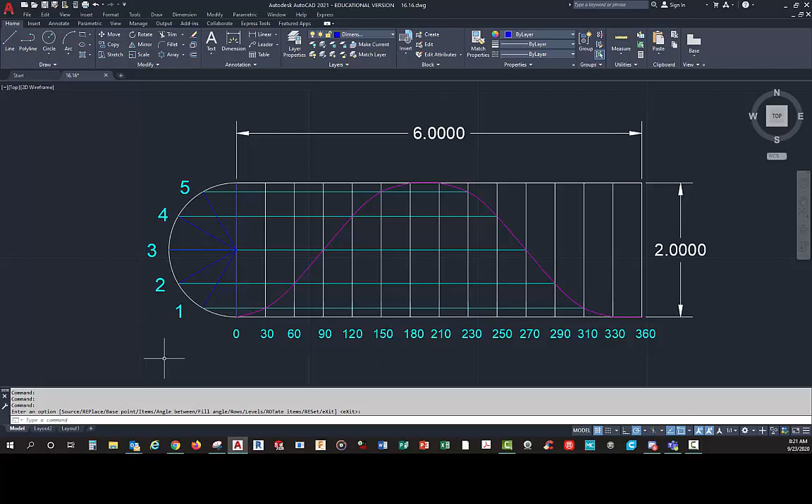Okay, that's good. For this example, it rises from 0 in simple harmonic motion 2 inches over 180 degrees, dwells for 30 degrees, and then comes back down in simple harmonic motion the same amount. This is a good example of how to do simple harmonic motion.

Alright, now let's take this guy here and copy him over. So now if you needed to do something more advanced, like uniform accelerated motion, you would need to get rid of this and this.

What you're supposed to do, what they show, is draw a line out here at some random angle, like so. And I don't think I lined it up. But anyway, it's early, so I guess I'm not feeling it this morning.

You never know when you might be actually watching this video. And there you go. Alright, so it doesn't matter.

I would actually probably just take this line here—and actually there's two lines, so that doesn't help me out. If I only had one line, that'd be good. Yeah, anyway.

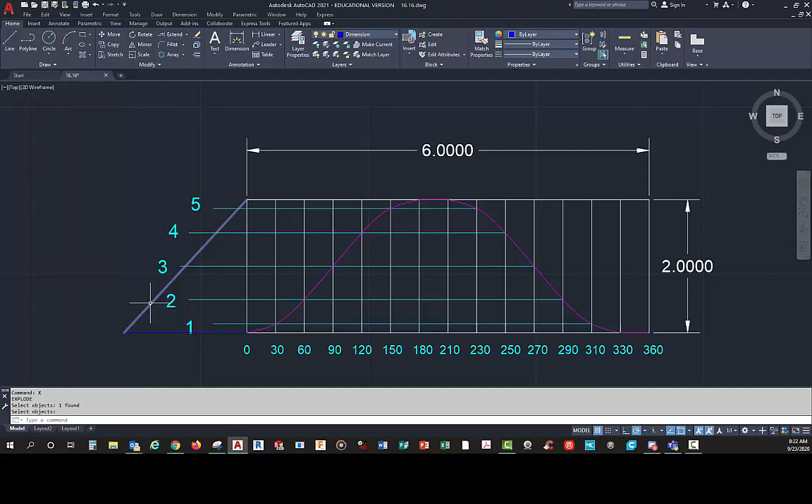Oh, it's a box, right here. I'm going to explode that so that I have separate lines. Hey, there we go. Okay, so what they show is taking this line here, and if you were using it manually, you would have an angled line.

Then you would take your ruler and line up your divisions, 0 on one end, lined up with this line up here. You'd line up with, in this case, 18 divisions, and then mark them all along your line, or mark them and extend them straight over to where they hit the line.

Well, in AutoCAD we don't need that—we have the divide command. You click on divide, click on your line, and it asks how many pieces you want. I need 18 individual pieces, so I'm going to do 18.

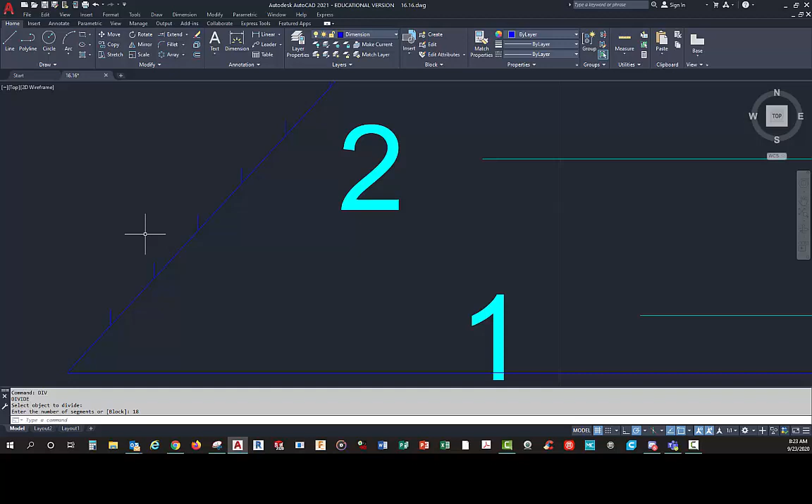You'll notice that whoever had this set up already has their point style set as lines or something. If you're not familiar with divide, what it does is create nodes, these little things right here. You have to come down and make sure this is turned on so it'll automatically snap to the node, so you don't have to keep typing node each time. That one's already turned on.

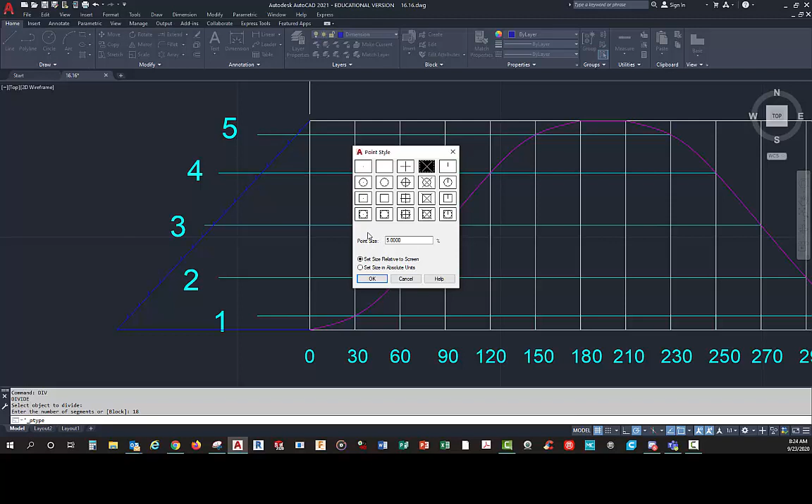The next thing I'd do is go up to Format. That's why you need to make sure this is turned on - mine says hide menu bar, if you don't have it on it'll say show menu bar. So I go to Format, then Point Style, and it pulls this up. This person's got it set at that. You might set it differently, I don't know, I always pick this for some reason. It doesn't matter. Then you hit OK.

Alright, so there are my points. The book says you need to do the first one, the fourth one, the ninth one, the 14th, and the 17th.

So if I scooch this guy over here, and then grab this guy - let's see, there's 2, 3, 4 - and escape. I'm going to make that a 4. This one's going to be a 9. The next one's going to be 14, add 1 in front of that, that'll work. And the last one needs to be a 17.

So we'll fix 17, click on here. Alright, 17 goes somewhere around here. 14. Alright, we've got 1, 2, 3, 4, right? 5, 6, 7, 8, 9 is in the middle, so we'll scoot that up a little bit. Now it's close. Then there's 10, 11, 12, 13, 14 is right here.

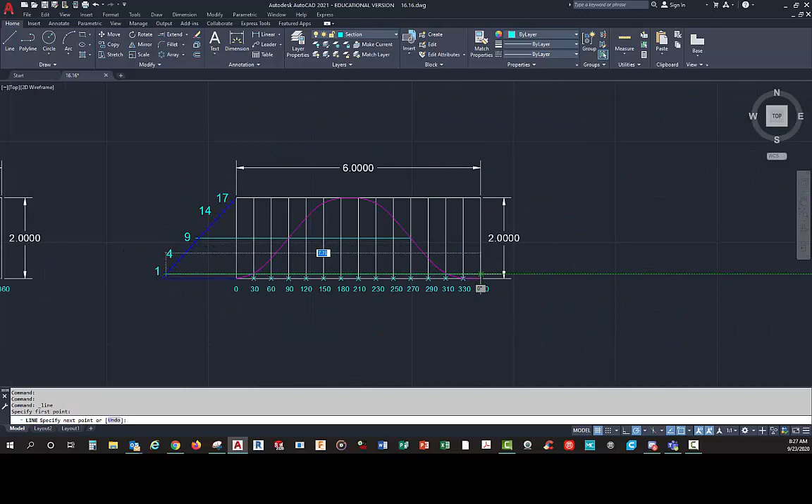I'll go back and we'll do this section line here. So I'm going to go line, and this is 1, right? So it goes over here. The next one is 4, so that's 1, 2, 3, 4, so I need to go line from there. Trying to get too fancy and help you out, but that didn't do me any good.

Now the thing is, if you look at it this way, we're in AutoCAD, so obviously you have 5 different settings, correct? So if that's the case, would you not have the same measurements possibly up at the top? Well, let's see - maybe you don't. Alright, so we've got 1, 2, 3, 4, 5, 6, 7, 8, 9. That one's good. 10, 11, 12, 13, 14 - aha, I miscounted, see, that's why you go back and check.

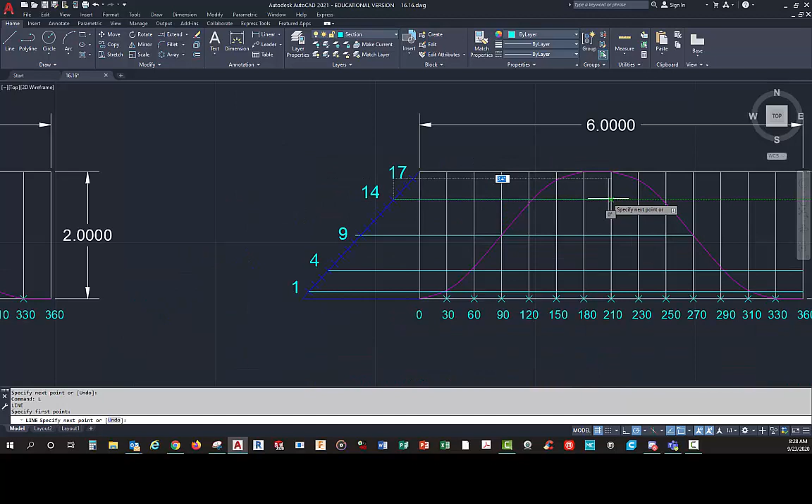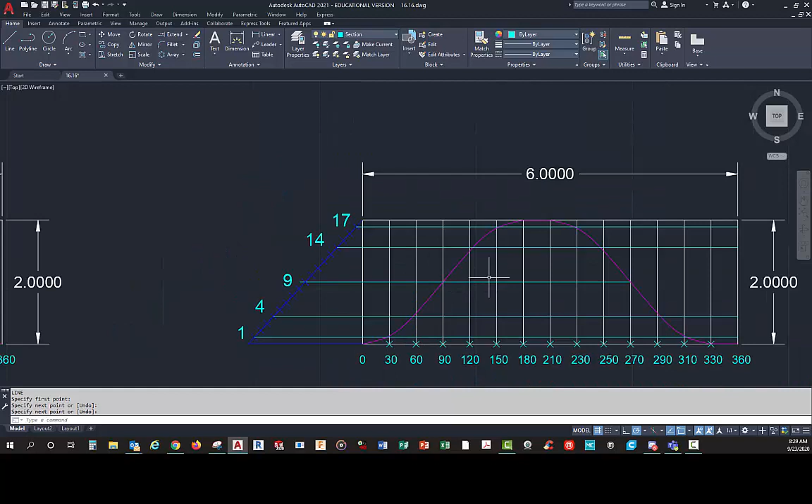Alright, it's not too early, I can actually draw - goofy. And then this one should be right here. Now I could probably measure the distance from here to here and it would probably tell me they're the same, but I don't know for sure. I'm not going to worry about it.

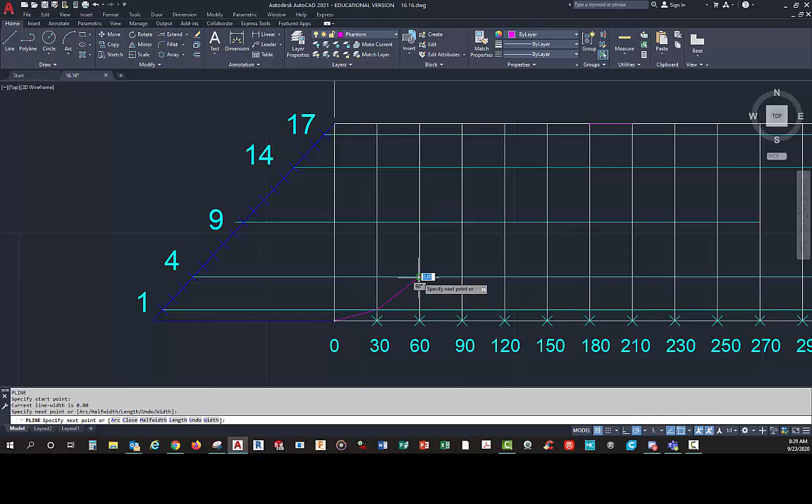Alright, so in this case, I'm going to go back and we'll go to the same one that they used, and we're going to do a polyline. You're saying, why are you doing a polyline? Well, I'll show you - if I do a polyline from there to there, from there to there, from there to there, keep on clicking, and boom. Okay.

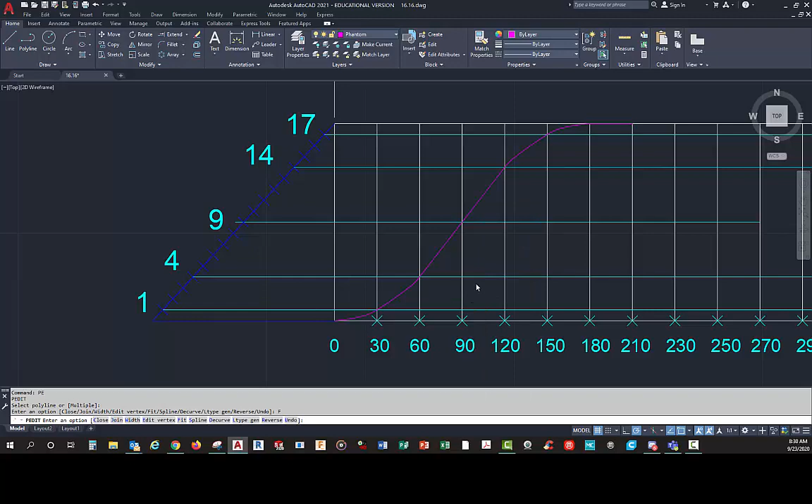So what I can do is type pedit, PE for pedit. I select the polyline and do a fit curve. Now that fits the curve to these points. If you do a spline, it goes outside of your boundaries, so don't use spline, use fit. Then enter to finish that.

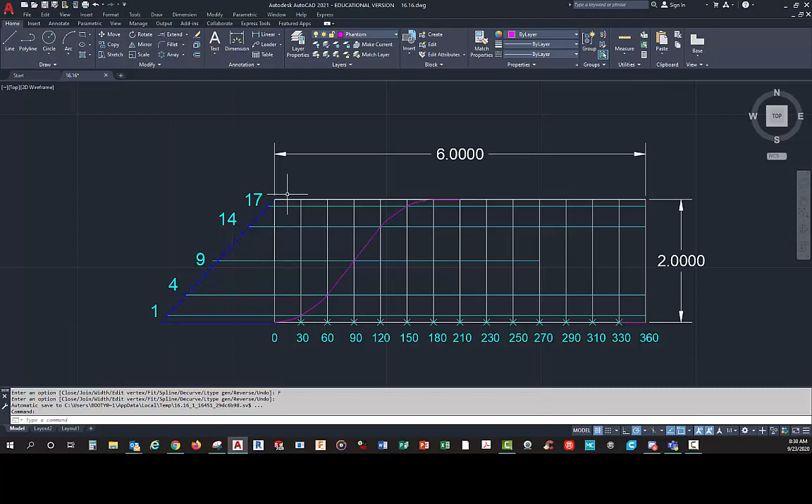Now on the other side, if it goes down the same, it finishes out the rest in uniform accelerated motion. So you have 1, 2, 3, 4, 5, 6. The main thing to remember is whatever it tells you it goes down in, you need to make sure that lines up with however many divisions you have, which here is 6. The other one with the half circle, simple harmonic, also has 6. So you have to keep that in mind and divide up your degrees to make sure it works. Sometimes you'll have something different than 30-degree increments.

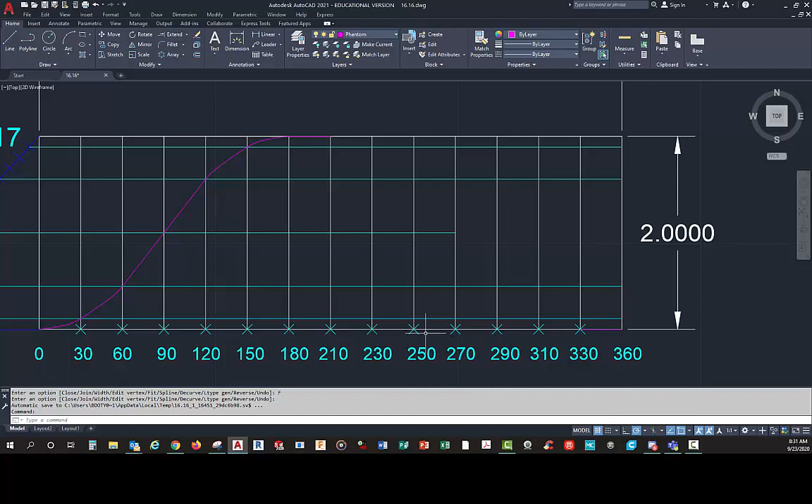That's why I've been sending back your work saying, hey, you need to fix this.

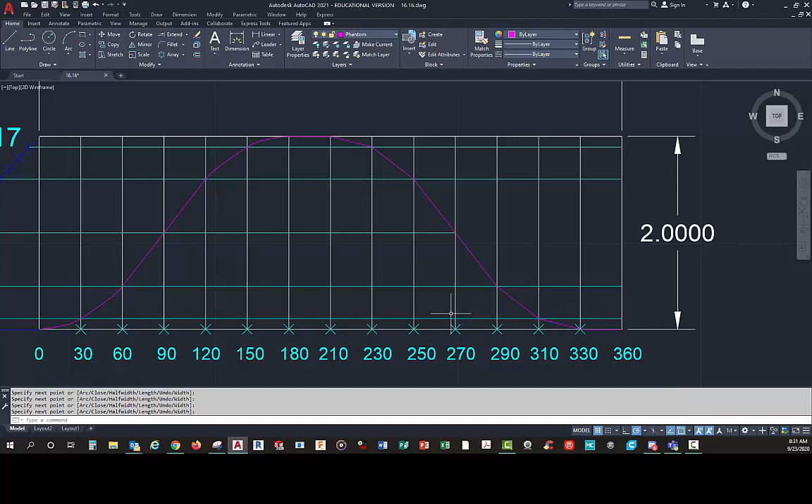Alright, so let's go back to polyline and go on back down the rabbit hole here. Bottom right there. I'm going to go to pedit, take the line, hit fit curve, and enter, and I'm happy with that.

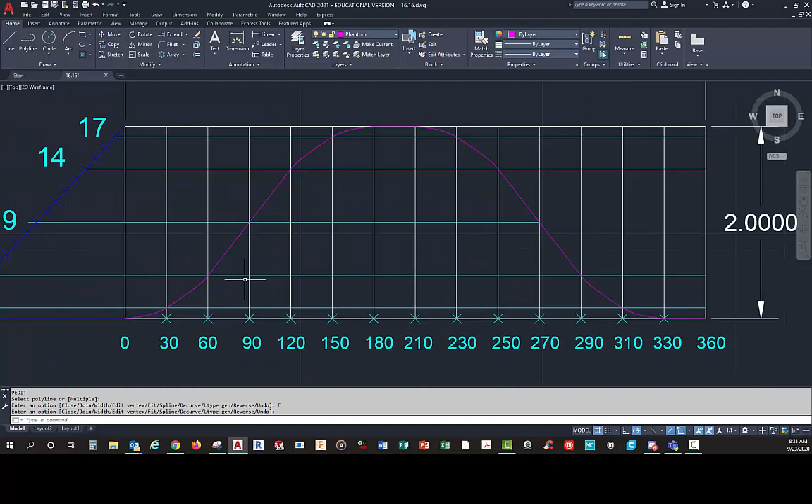So yeah, see, that looks really good. And if I look at the answer book, that looks pretty well the right thing. So this is basically how you do uniform accelerated, and this is what you're doing whenever you do simple harmonic. The thing you have to look for is what's your total rise, this distance. If it doesn't tell you what it is, like in this case, they did 3 times the length. Just took 2 times 3 and 6, and boom, that gives you a nice, elongated curve that makes it good and smooth.

The other thing you need to remember is do you need to adjust your degrees and make these lines closer together so that you get your 6 divisions in between where it goes up. Like if it only goes up halfway, then I'd need to have 6 divisions.

If it goes up, let's say 1 inch in 120 degrees, well I'd have to draw a line from here over to the 120, divide it into 6 pieces, put my lines on it, and figure out what's 120 degrees divided by 6. Do the math. So that would be 20-degree increments.

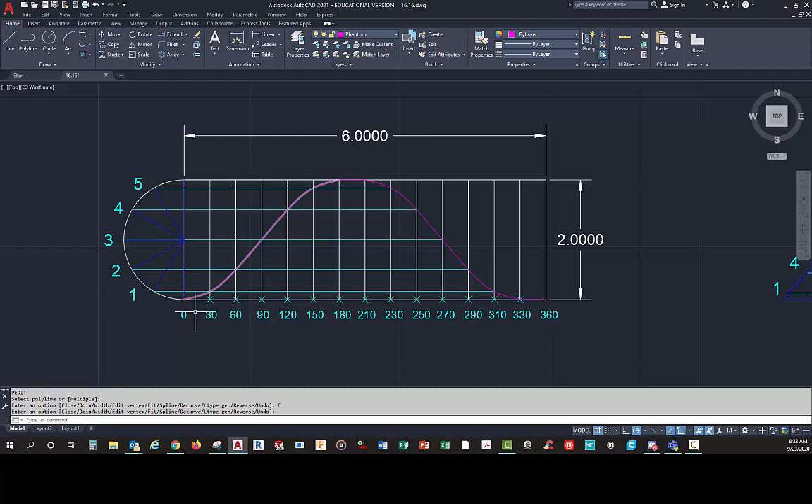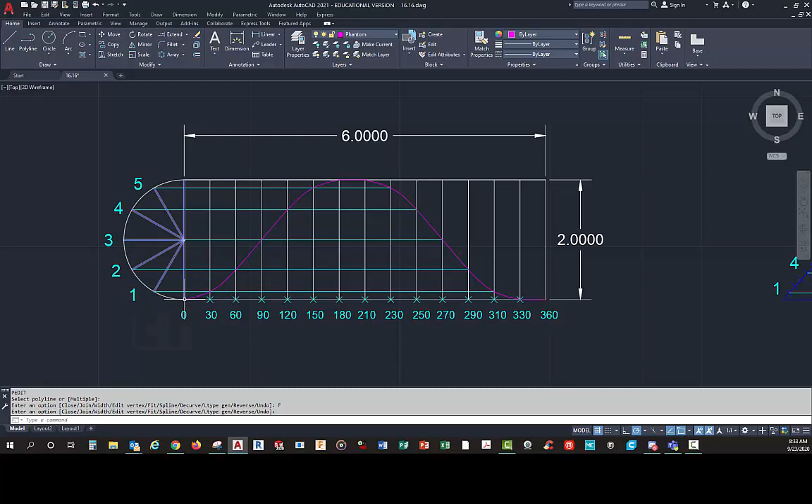So then you would go in and change your labels between 0 and 120 to those increments, and that would still line up. Then you'd have your circle, like if I was doing simple harmonic, my circle would be just this little piece here. It would be a half, starting from here to here as the diameter of the circle. So this would be about half the size, and it would still work the same way.

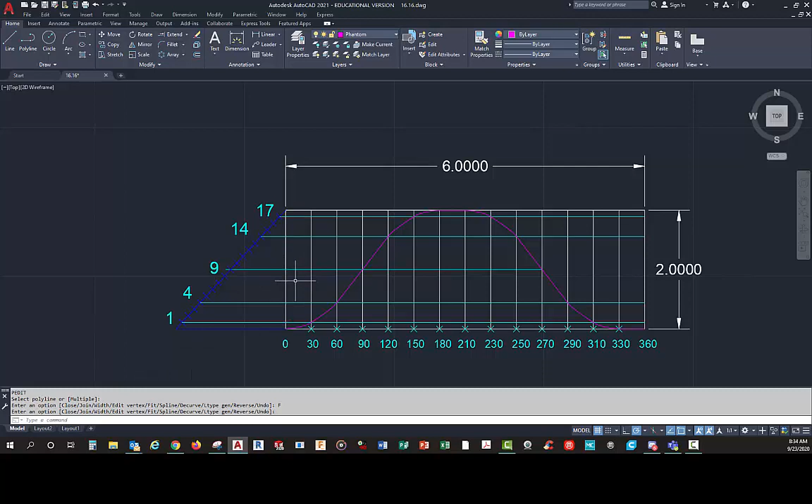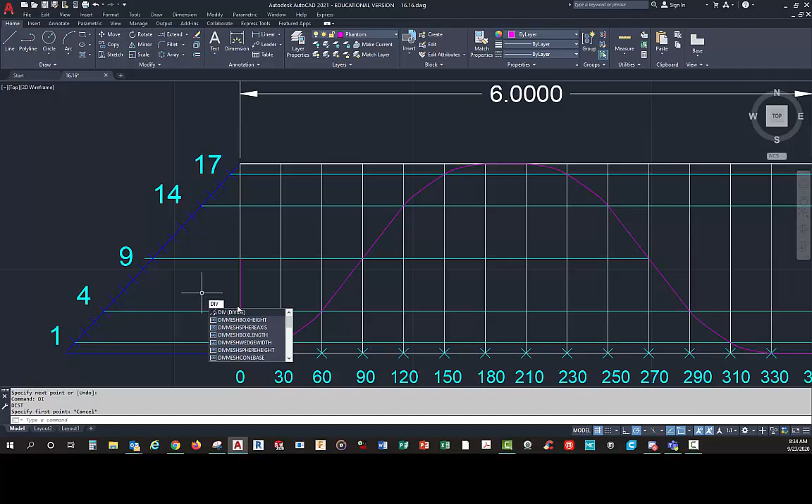Same thing on this - whatever it goes up to before it dwells, you would divide that line into 18 pieces. Like I said, you can just draw a line as an example. If it only went up from here to here, I would take this line, go to divide, pick your item, 18 items. I've already got the point style set up.

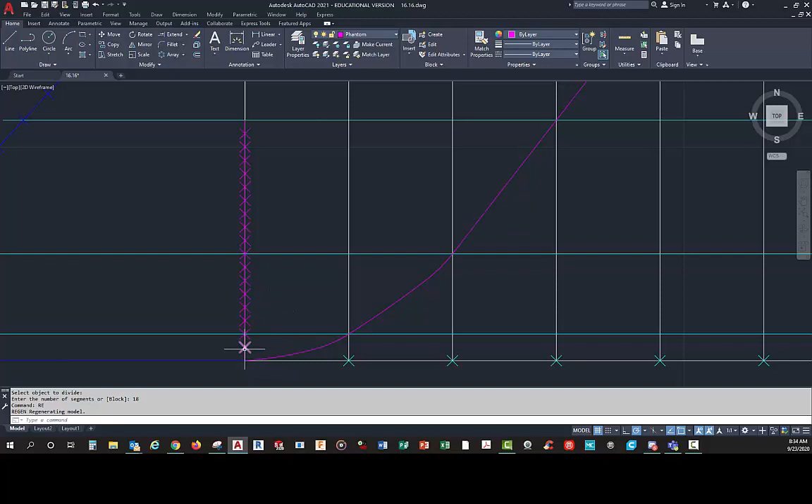If I zoom up, look, they're all stuck together, right? If you do a regen, RE, it changes the scale for you whenever you zoom in. So then it might make it easier for me to draw my 1, 4, 9, 14, and 17 lines. Alright, so those are just some variations on things just to give you an idea how it works.

Hopefully this helps you out. So this is simple harmonic, and this is uniform accelerated motion. I hope this helps you out, and good luck and have fun.